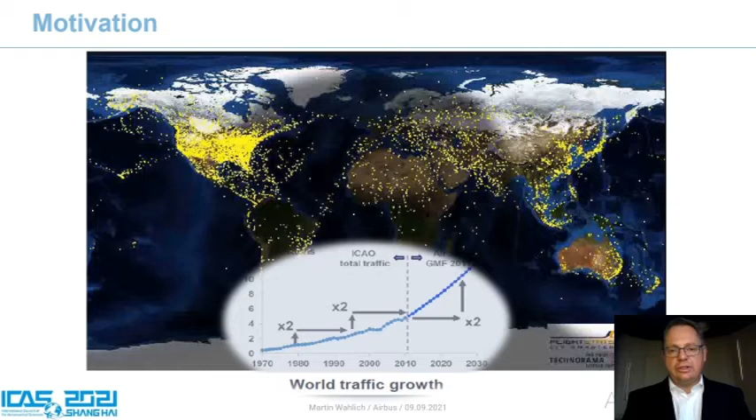Well, despite the COVID-19 crisis, which is still ongoing, we will face a significant increase in aviation traffic. And this makes it inevitable to reduce the ecological footprint of passenger aircraft. Here AFLoNext is tackling 4 key topics leading to more environmentally friendly aircraft. So first, we have one major pillar which tackles and deals with laminarity in order to reduce drag, and finally the fuel burn of aircrafts.

We have active flow control here, especially on local applications, to increase aerodynamic performance during takeoff, during landing, and to allow installation of more efficient engines. We have passive noise control, as noise is a significant environmental factor of aircrafts. And we have vibration control and mitigation in order to allow a design of optimized airframe components in order to reduce overall aircraft weight.

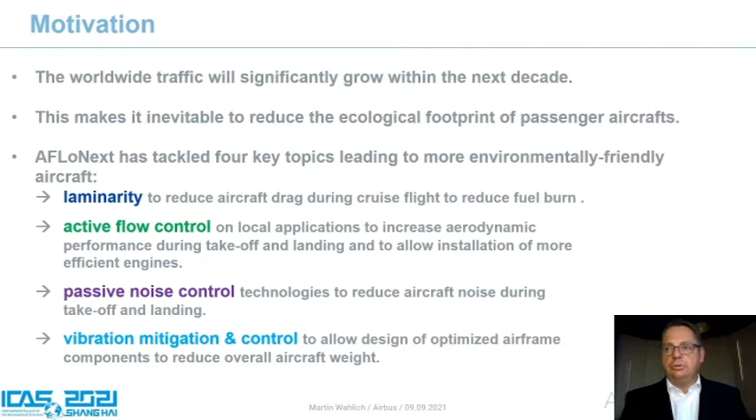So let me talk a little bit about the project setup and the detailed objectives. Well, this is the statistics. Very bluntly speaking, it's 40 partners, 15 countries. We have a total budget of 37 million euros in total, where we received effectively nearly 24 million euros effective funding from the European Union. Project duration was 5 years. We started in 2013 and we ended in 2018.

So this is just the pure figures, but just let me show you the landscape of our partners, which is for me rather impressive. You see, we are spread all, or we were spread all over Europe. We had 40 partners, 15 countries, and the budget figures are already mentioned. As you can see, we as well had Russia, Israel, and Turkey as associated members as well.

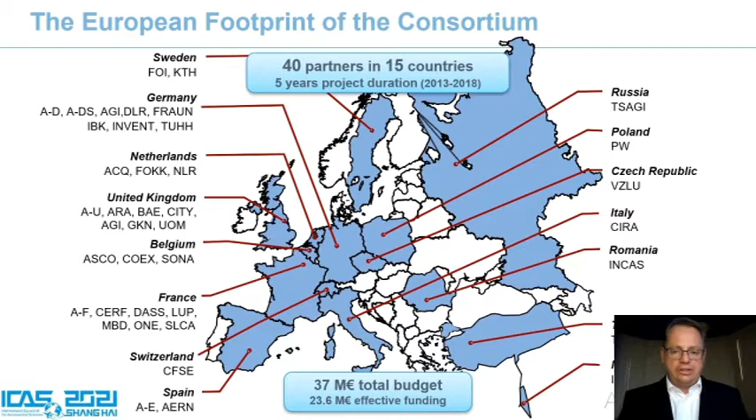Okay, the general objectives. The general objectives of AFLoNext are quite clear. We wanted to mature promising flow control technologies up to very high maturity levels, that means TRL5, maybe TRL4 up to TRL5, and then hand them over to large-scale demonstrators, such as what you can find in Clean Sky 2. Here again, the 4 pillars I've mentioned before: this is hybrid laminar flow control for drag reduction, active flow control, passive vibration, and noise control technologies.

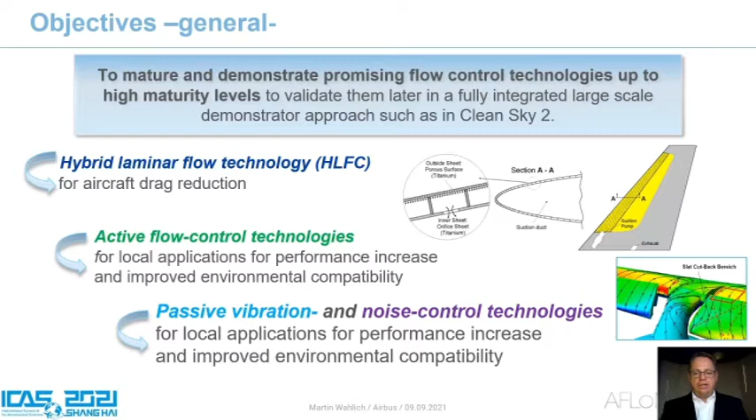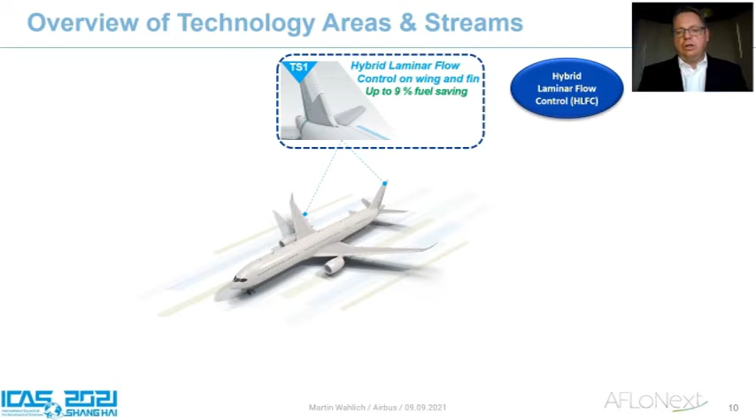In order to visualize the more detailed technology streams we have in AFLoNext, I will give you here a brief overview. So when we talk about hybrid laminar flow control, we want to apply it on the VTP and on the wing. And this could lead, if you apply hybrid laminar flow control on a complete aircraft, to up to approximately 9% fuel saving. Then we have the areas where we wanted to apply the active flow control principles on local applications. So we did it on the outer wing in order to allow a more aggressive design of a wingtip.

We applied it on the pylon wing junction. Here, active flow control could act as an enabler to install a new generation of engines, namely UHBR engines, which are much larger in diameter than the conventional ones. And we have active flow control on the trailing edge as well, in order to increase high lift performance.

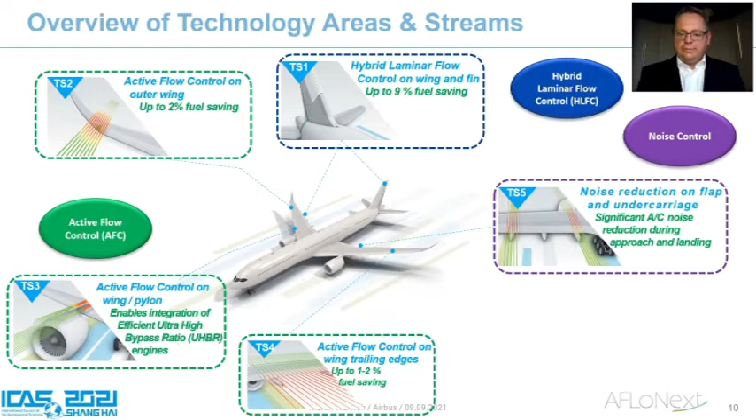In total, we could gain up to 4% in fuel saving if applied properly. Then we have the noise control area, where we focused on the interaction of flap and main landing gear. Finally, we had investigations on vibration mitigation and control in the undercarriage area, in order to allow new design principles for these kinds of components.

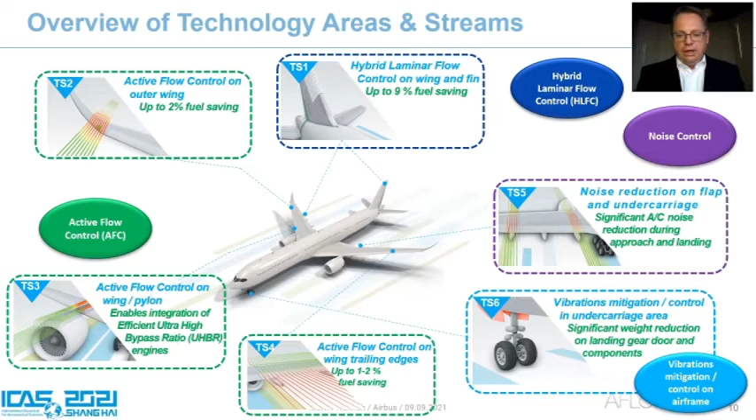Okay, this was the setup. Now I will show you again the major objectives and the achievement of each techno stream I've shown before. So we start with hybrid laminar flow control.

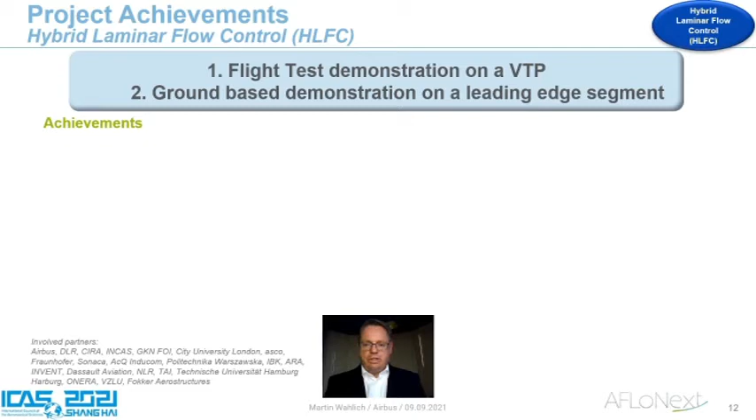The main objective, as said, was implementation on a VTP and implementation on a wing. So the main objective finally was to have a flight test demonstration on a VTP and to build a ground-based demonstrator on a leading edge segment to check system installation on the wing.

What have we achieved? We could achieve to modify an existing A320 VTP and conducted, during April and May 2018, a flight test with a simplified HLFC system. This success should really be highlighted here, as this was the first time in Europe this kind of system has been flown and tested successfully.

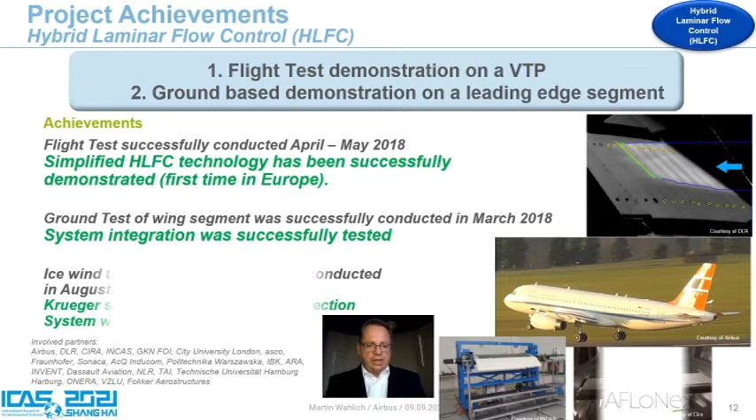In addition, having a look on the wing, we tested in March 2018 a ground-based demonstrator representing a wing leading edge, and we conducted an icing wind tunnel test to test the slat system and the wing anti-ice protection system at CIRA premises in Italy.

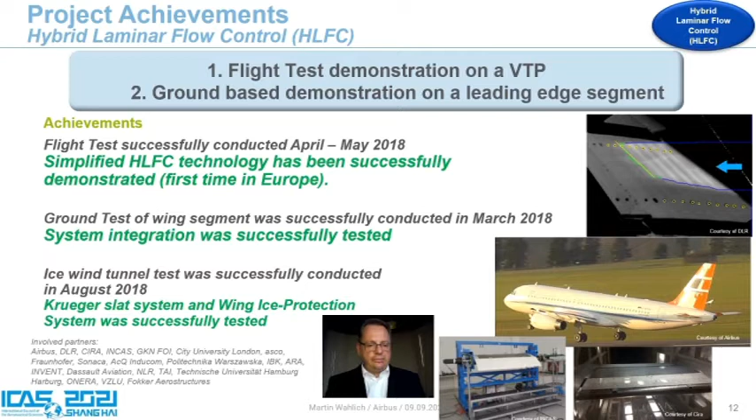This is just the pure results, but we have, of course, what I call spin-off and acquired knowledge besides these project successes. If you look at the acquired knowledge and spin-offs, what have we learned in addition, or what comes along with this? We could prove design and manufacturing methods for HLFC purposes, including the validation of our numerical prediction methods across Europe, which is really a success.

We developed, built, and successfully tested and validated an in-flight monitoring system for the flight test aircraft, to have an online measurement or evaluation of the laminarity achieved on the VTP during flight. And looking more on the wing side, we could achieve several different layouts for HLFC integration on a wing in aircraft design.

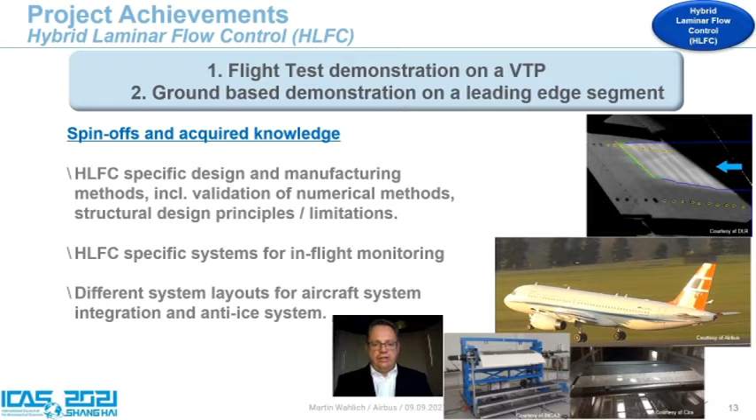Okay, this was the HLFC part. Now coming to the active flow control part, I would say two major objectives we followed. First, we wanted to have wind tunnel testing of different active flow control systems, with full scale wind tunnel testing, meaning a nearly one-to-one scale wind tunnel model. And we wanted to develop and integrate different active flow control systems for the wing.

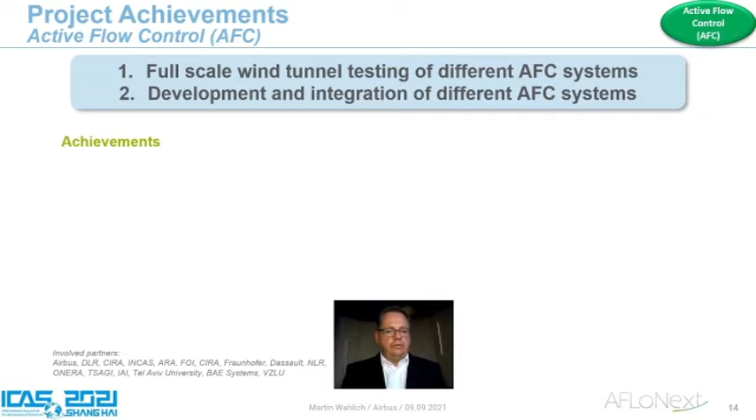What was very successful: we tested a nearly full-scale wind tunnel model at TsAGI premises, where we could really show the potential of active flow control on the pylon wing junction in order to recover lift lost due to UHBR installation.

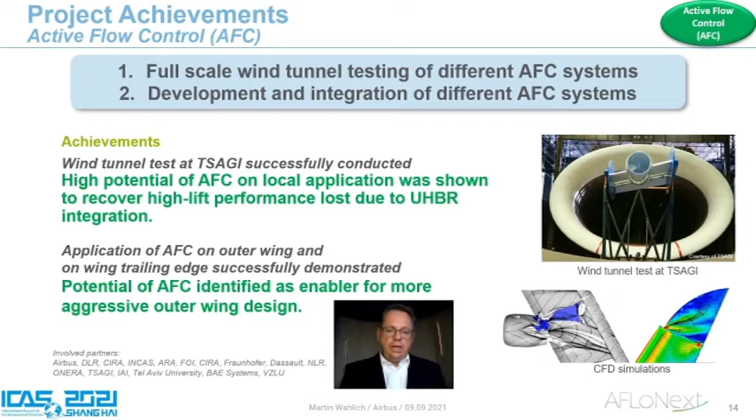In addition to this, several AFC systems for the outer wing have been designed, built, and tested. Here we could really show that AFC could be a potential enabler for more aggressive outer wing design. That means you will be able to overcome flow separation on the outer wing induced by winglet design. Here, active flow control could help give a more aggressive wingtip design.

Again, what were the spin-offs and acquired knowledge? During the complete work package, several different kinds of actuator principles have been designed and tested. I'll just show you the abbreviations, because showing the deep technical principles would burst this presentation. So we have a pulse jet actuator, synthetic jet actuators, a hybrid version of both, and we developed active flow control actuators as a tile inserted in the surface of a wing, and so on.

By designing the hardware, we could validate and benchmark several different CFD methods with respect to active flow control simulation, which is really a step forward for this kind of simulation and for integrating this kind of design into the aircraft process.

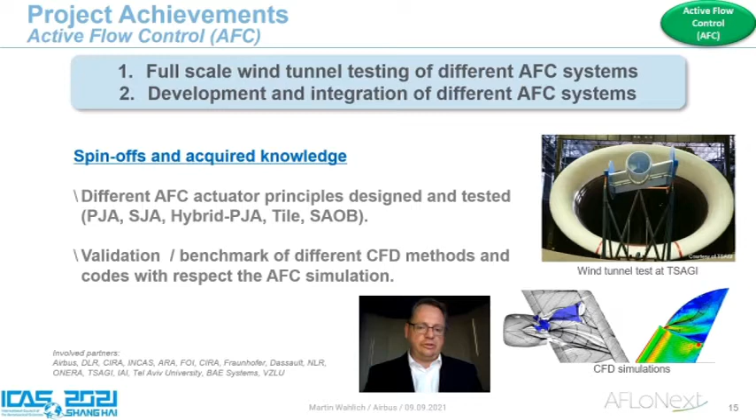The third major pillar was really the noise reduction. As said, noise reduction is really important for the environmental footprint of an aircraft. It's not only fuel burn, but as well noise reduction.

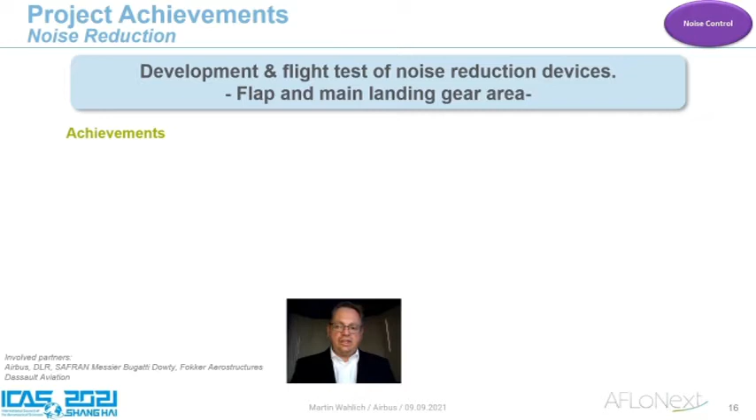Here we concentrated really on the flap and main landing gear area. We designed and tested several kinds of noise reduction devices. We performed a flight test with a porous flap side edge, what we call it like this. So you take a porous material on the outer flap side edge and measure the noise impact of this kind of device.

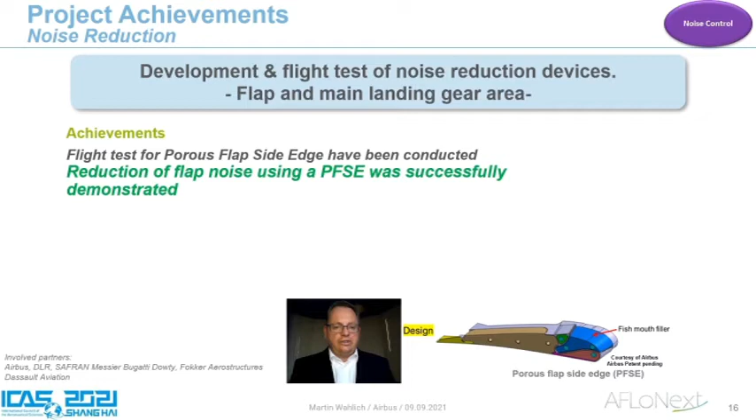Not in AFLoNext, but in a DLR own program, we developed together with LN ATRA several noise reduction devices, mainly for the landing gear. As you see on the right hand, it's a torque link mesh fairing, we have a new kind of leg door fairings, and we have some brake covers. This has been successfully demonstrated, and the full potential of these kinds of noise reduction devices has been shown.

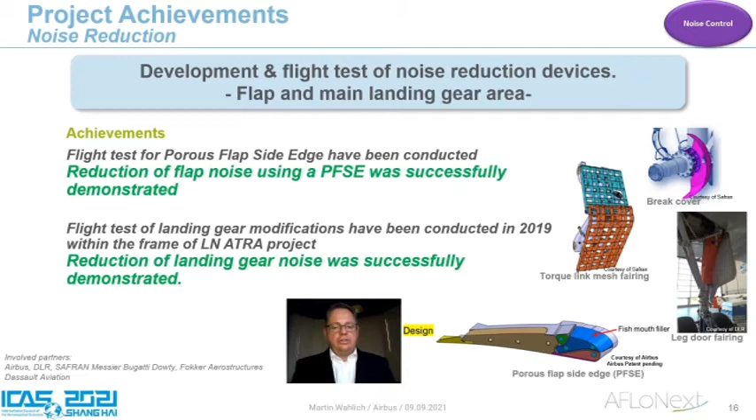So this is the noise reduction part. And as well, same principle, what kind of spin-off and achievements, especially the porous flap side edge, could be directly applied for the aircraft manufacturer. This is possible, so here we really reached a very high TRL.

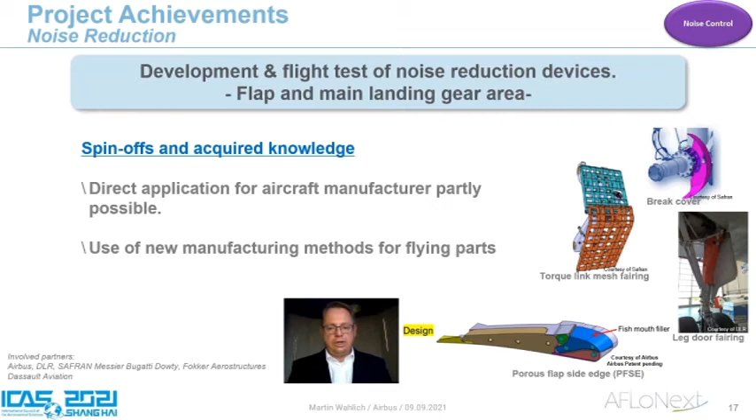And especially as for the other shown parts, we made use of new manufacturing methods here, namely additive layer manufacturing, so or rapid prototyping, as you like. This was really very, very successful.

Last but not least, I come to a work package which is a little bit different from the other ones, as we are here dealing more on the structural side, not on the aerodynamic side. So about vibration mitigation and control, what were the main objectives? The main objective was to develop a numerical method for simulation of these phenomena I will show you later on.

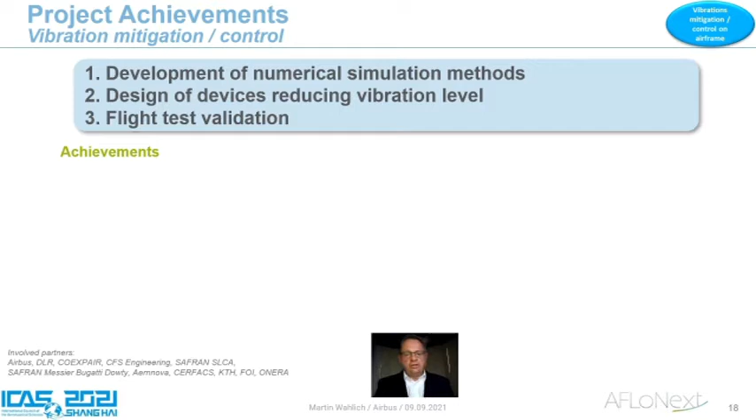Some wakes coming from the nose landing gear will hit the main landing gear doors, causing a lot of vibrations and might cause structural fatigue. For the time being, this kind of phenomena was not properly modeled in a numerical process, and here we could combine a structural and aeroelastic coupling.

This was the major outcome of AFLoNext.

In addition to this, we thought, okay, how can we reduce these kinds of vibrations? And here we had a dual approach. One, we did mechanical devices to reduce the vibrations, tuned mass dampers, and we had aerodynamic devices which influence the vortexes in order to reduce the vibration level.

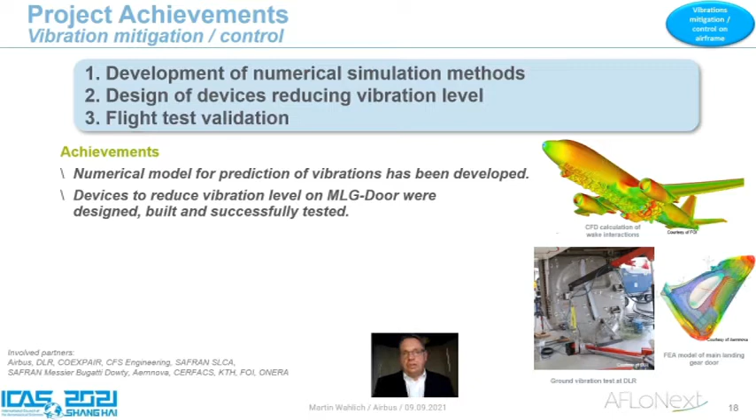Both systems have been tested and successfully validated during a flight test conducted as well in April and May 2018.

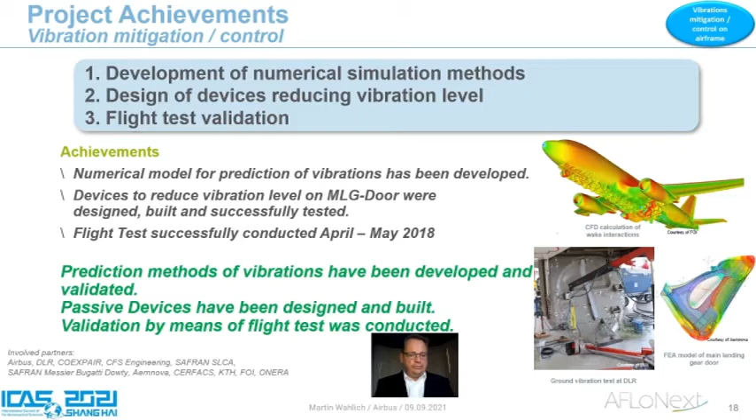Again, the same methodology: what kind of spin-off and acquired knowledge? Well, especially for the nose landing gear door, we developed a new method for manufacturing in order to have a monolithic nose landing gear door.

We could develop devices which could be used directly by the aircraft manufacturer, especially vortex generators, spoilers, on the main landing gear door. So these means could be directly implemented on an aircraft. And I think this is the major point: we could validate different CFD methods and codes.

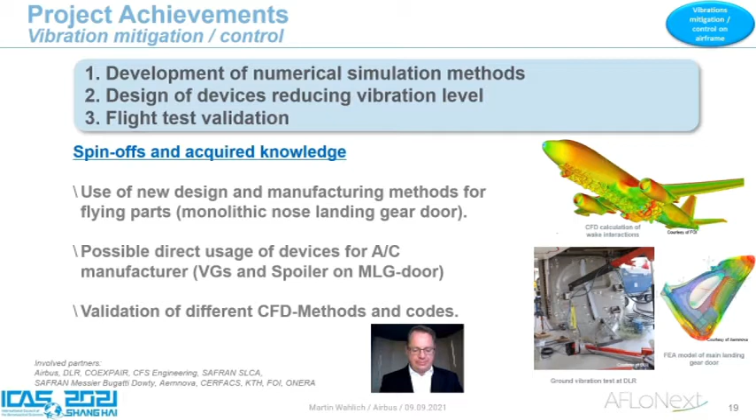Okay, this was the technical part of AFLoNext. And now, what is the conclusion? What is the outlook?

So first, let's start with the outlook. As mentioned, AFLoNext, or the technologies we developed in AFLoNext, should be handed over to a larger research program for further maturation. Here, as an example, I used Clean Sky, and I will go through each techno pillar and tell you what is, let's say, the outcome, what we are working on at the moment.

So about HLF, hybrid laminar flow control, HLFC. Within the frame of large passenger aircraft, we have a large work package in Clean Sky 2 called hybrid laminar flow control and advanced laminarity. We focus on the one hand on the HTP and on the wing. HTP is for manufacturing processes for serial application, and the wing is to simplify the HLFC system for a better integration on the wing. Here, clearly, AFLoNext was one foundation brick, delivering the results enabling these work packages.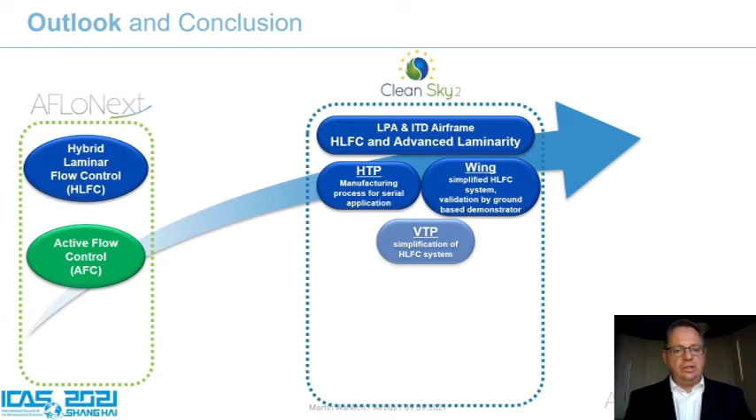With respect to active flow control, we have active flow control set up as a work package in Clean Sky 2, especially for ultra-high bypass ratio engines. So the UHBR integration is not strongly relying on it, but active flow control is an enabler to this. Here as well, AFLoNext could deliver very valuable results for further maturation in Clean Sky 2.

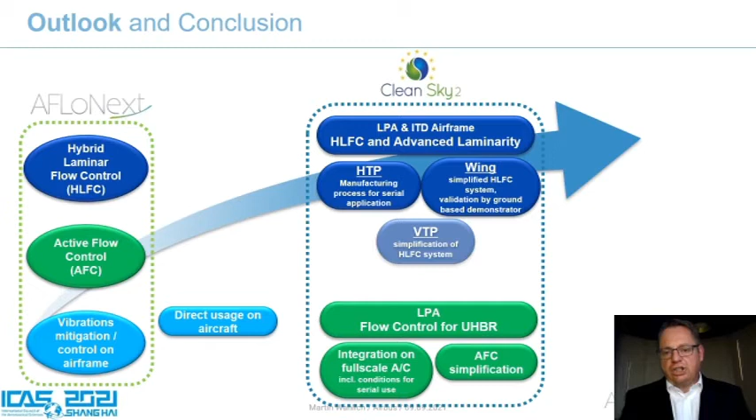About vibration mitigation and noise control on airframe, there is no continuation in Clean Sky 2. As very simply said, we could use it directly on the aircraft. There is no need for further maturation in the frame of a really large R&T program.

So as well, in Clean Sky 2, we are building large demonstrators. The next step could be Clean Aviation, the successor of Clean Sky 2, rising on the horizon and getting more and more mature. We hope to get some input from Clean Sky 2 which could be directly linked to the AFLoNext outcome for in-flight applications. This is the outlook.

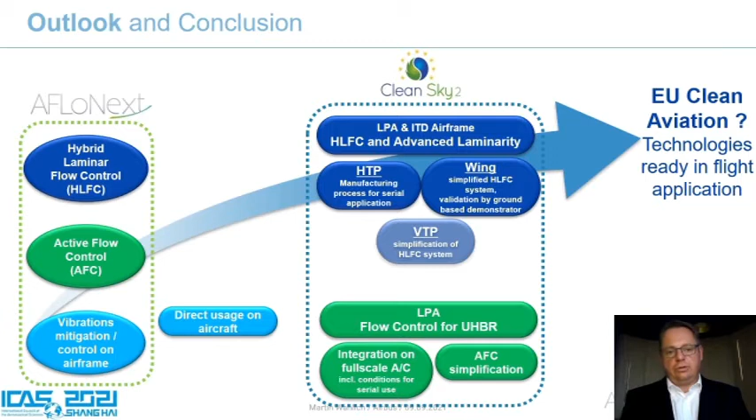If I look at the conclusion, we could really see a very strong engagement from the participants, which has always been visible. Now I'm striving a little away from the technical side, going more onto the collaboration side. There was never any retreat from a partner, or partners refusing to work because they were short of budget or short of resources. If problems were encountered, we could always solve them. As shown, all major objectives of AFLoNext have been achieved.

As shown as well, AFLoNext could contribute to reducing the overall ecological footprint of a passenger aircraft if these technologies were applied on new aircraft designs. And we achieved outstanding technical results as well. This is the link to the main objectives, which is really the foundation of several actual and future research activities.

And as said, and already partly done, it's a handover of these kinds of technologies we have developed in AFLoNext, to further mature them and really make these technologies available for the next generation aircraft in the next decades. So thanks a lot for your attention, but I have some final closing words.